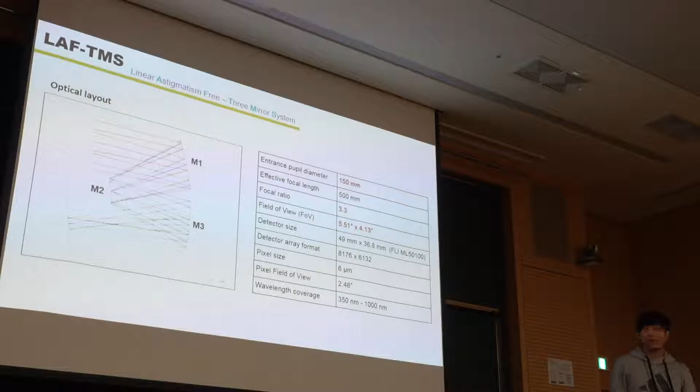So LAF-TMS is an off-axis three-mirror system. There are three off-axis mirrors with an entrance pupil diameter of 150 and a focal ratio of 3.3. And this is a very wide field of view telescope, with 5.5 by 4.1. So this optical design is quite unique. So let me explain with one example.

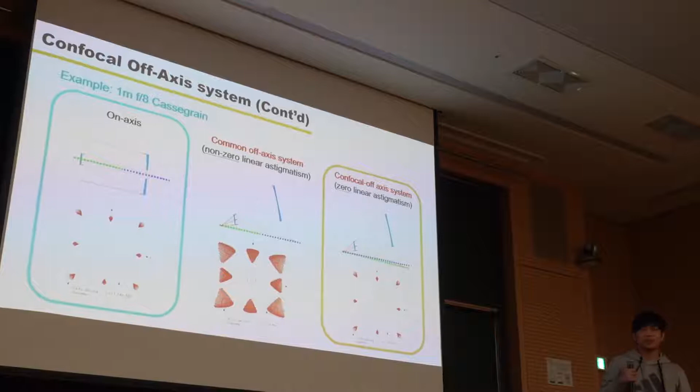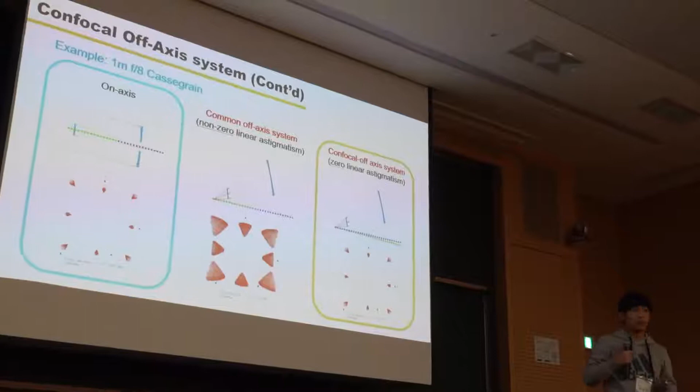So for instance, if there is a 1 meter Cassegrain on-axis system, we have an identical point source image at the image center, and there is coma aberration on the other field. This is normal aberration. But if we move on to a common off-axis system, there is exactly the same optical performance at the center, but there is additional aberration on the other field, which is linear astigmatism.

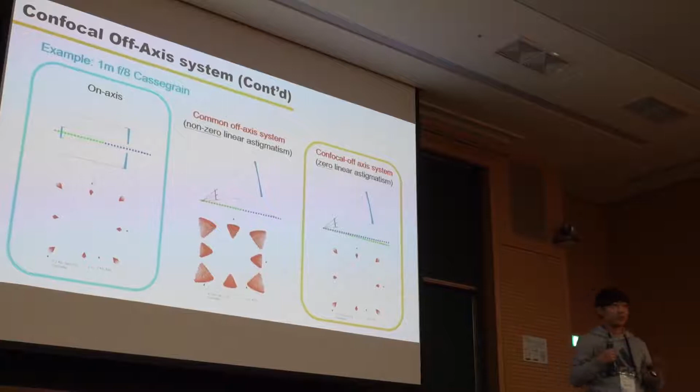So actually, this astigmatism degrades image quality significantly, even worse for the wide field of view system. But if we design the off-axis system as a confocal system, we have exactly the same optical performance as the on-axis system by eliminating linear astigmatism.

So with this optical design, I designed the aluminum mirror. As this material is aluminum, we can just mount this mirror to the optomechanical structure using screws. So we put the screw, and there is a shim structure between the mirror and the optomechanical structure. And also there is an L bracket on the side of the mirror. So by changing the thickness of this L bracket and shim, we can adjust the mirror position for the

alignment. And there is a thermal expansion slot on the side of the mounting position. This slot suppresses the assembly stress and also the thermal stress. So this is one example of the simulation result. I put the assembly torque on these 3 points, and this color scale shows the displacement and stress.

And this red part shows that there is much stress from the assembly torque, and this part is displaced by the torque. But if you see the mirror surface, this stress doesn't really move onto the mirror surface, so we can protect the mirror surface from the stress. So the results show that for all M1, M2, M3 mirrors the surface RMS error by assembly torque is around 51 nanometers to

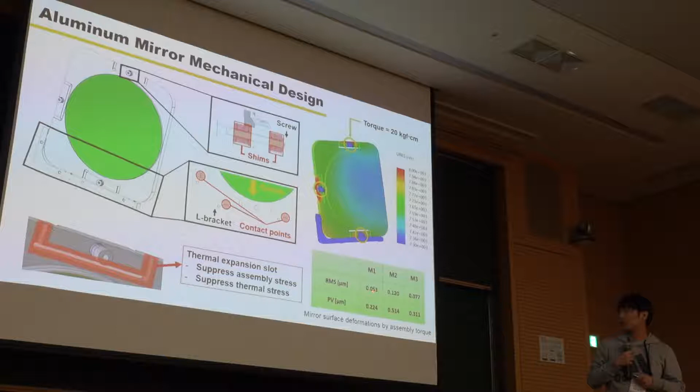And we also designed the optomechanical structures. The optomechanical structure has 4 big components: this yellow one holds M1 and M3, this gray one holds M2, and this blue one suppresses stray light, something like a baffle. We found that much of the stray light is reflected by this M2 mounting surface, so that's why we put this structure to suppress the stray light. And all the mechanical structures are lightweight, because LAF-TMS targets a satellite payload system.

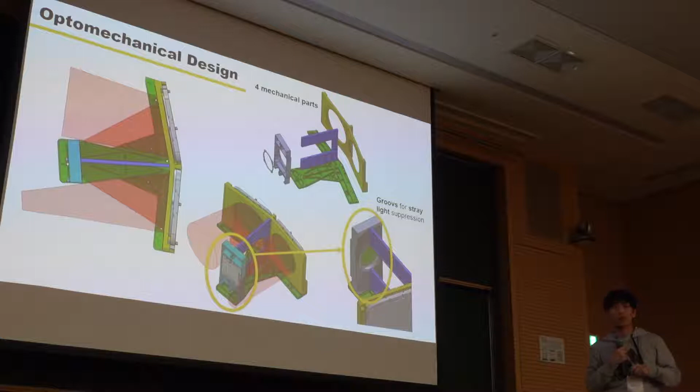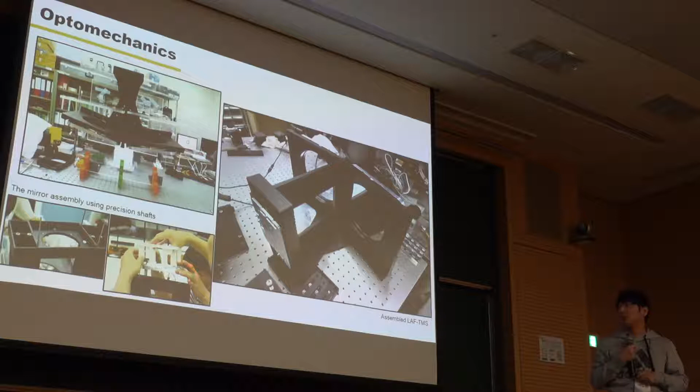So these are the pictures after we fabricated, and this small picture shows the accurate assembly process of the mirror. We use this precision shaft to accurately position the mirrors. And this shows the assembled LAF-TMS. And as this system targets a satellite payload, we need to have analysis for the vibration environment.

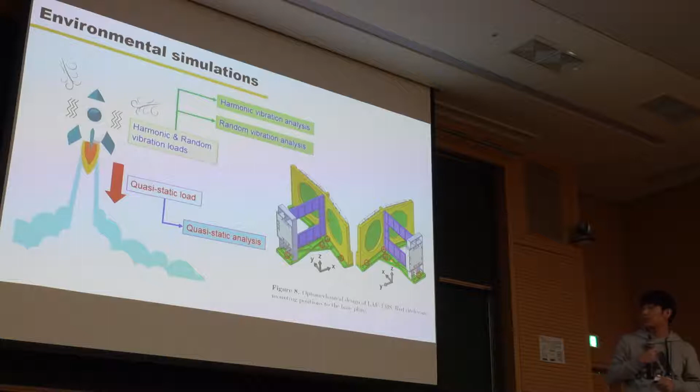So we consider the quasi-static load, which acts when we launch the system, and also harmonic and random vibration loads. So we did the quasi-static analysis and harmonic and random vibration analysis. These red circles show the boundary condition, which is the fixed position of the whole system.

For quasi-static analysis, we used the mass acceleration curve for the quasi-static load. This calculates the maximum acceleration for a specific payload mass, so we can calculate the bound of acceleration with this equation. For our case, the mass of the LAF-TMS is around 10 kilograms, which corresponds to around 10 g. So we put this 10 g on all three axes.

And this figure shows the stress plot. In each axis, we pick the maximum stress point, and we compare this maximum stress with the yield stress of the material, which is 275 megapascal. And then we calculate the margin of safety. If the margin of safety is positive, we can say this system is safe for this environment. And if the margin of safety is negative, it indicates design failure.

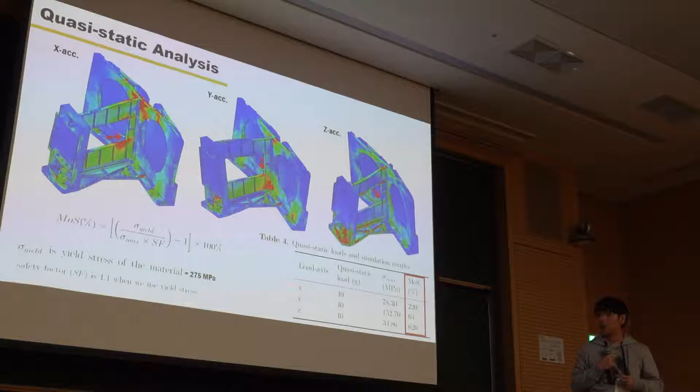So if you see this part, we have all positive margin of safety for all three axes. So this is quite okay for the quasi-static load. And also we need to do some modal analysis to calculate the natural frequency of the system.

So this is the payload system for the satellite, and this will be mounted on the launch system. So we need to avoid matching the natural frequency of the payload and the launch system to avoid the resonance phenomenon. Normally the launch system requires the natural frequency of the payload system to be higher than 100 Hertz, and our natural frequency is around 121, which is quite okay for the general requirement.

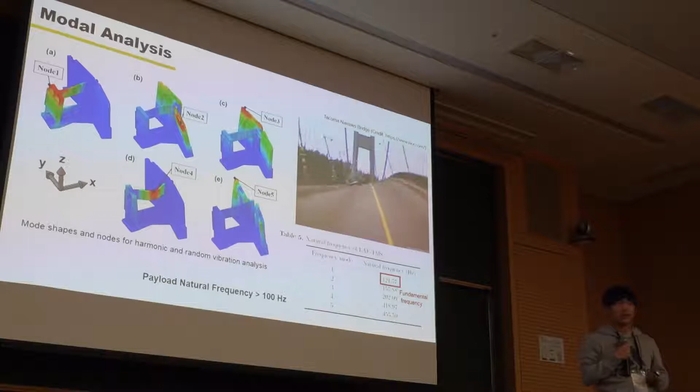So this shows the response plot for the harmonic analysis and the random analysis. If you can see these black lines here, they are actually the input values that I just showed you on the last slide. And the red, blue, and magenta colors are the responses, which are the results of the simulation. You can see there are some peaks at specific frequencies; the x-axis is frequency. These peak frequencies actually match the natural frequencies of the system that I analyzed in the modal analysis.

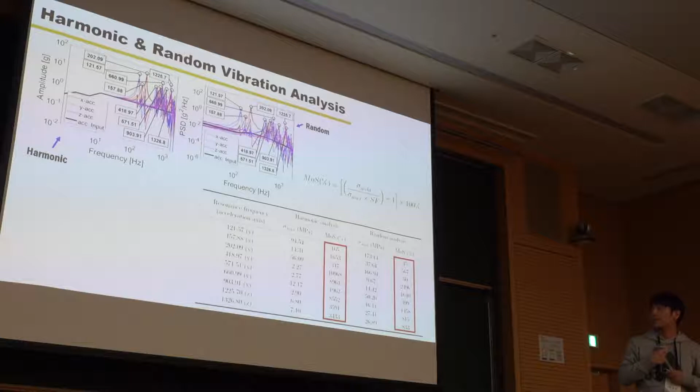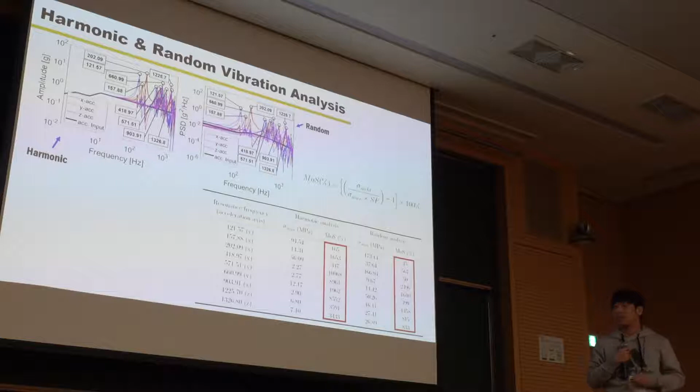So I got the maximum stress value at that frequency for both simulations. For both analyses, for all resonance frequencies, I picked the maximum stress and compared it with the yield stress. And then I calculated the margin of safety, which is almost the same process. So you can see here, there are all positive margins of safety. So I can say that this is quite okay for the harmonic and random vibration analysis, and also for the quasi-static analysis.

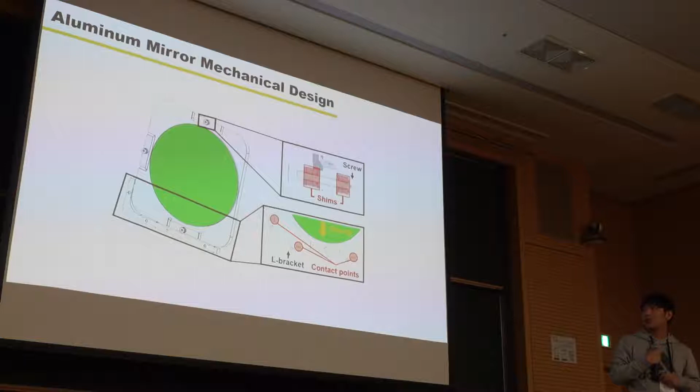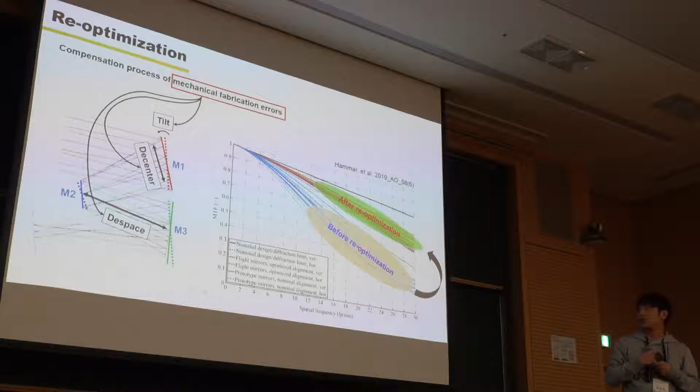In the very first part of my presentation, I showed you the mirror design. There are shims and an L-bracket between the optomechanical structure and the mirrors. By changing this thickness, we can actually adjust the mirror position. For instance, if we have some errors from the alignment process or the fabrication process, like tilt or decenter of the mirrors, or despace, which is the inter-mirror distance, then our optical performance will degrade by this error. But by adjusting this position, we can actually maximize the optical performance again.

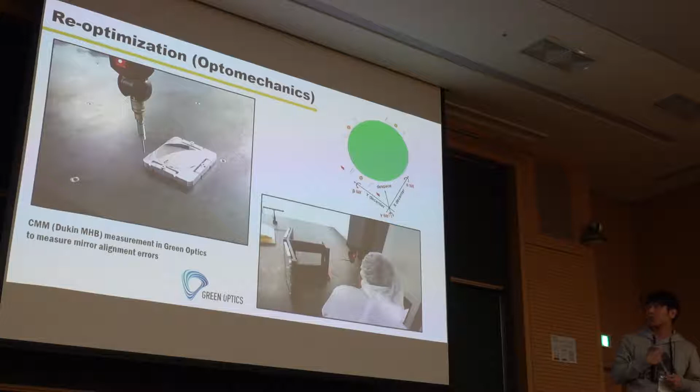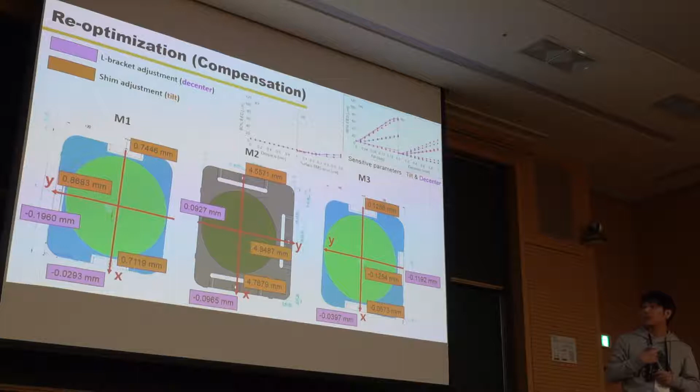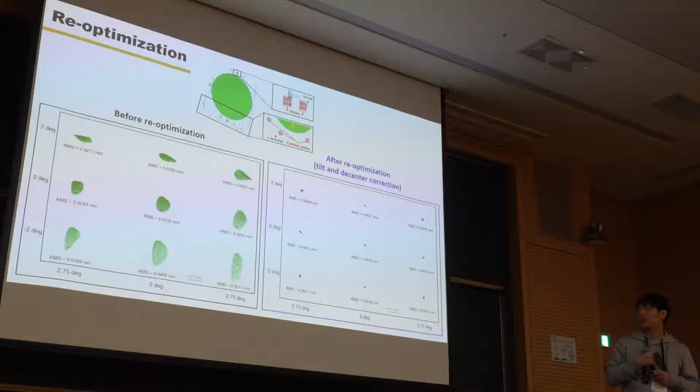In this process, we only compensate the tilt and decenter, not the despace, because from the sensitivity analysis, we found that tilt and decenter degrade the optical performance more significantly than despace. So we only compensate these two values. The left one is the simulated one with the misalignment errors, so you can see a large spot size. Then if we optimize the system, we get nearly the nominal design.

And then we also measured the optical performance, not only at the center, but for the whole field of view. If you can see, there is no dramatic optical performance degradation by linear astigmatism for all fields of view. So this is the optical performance result.

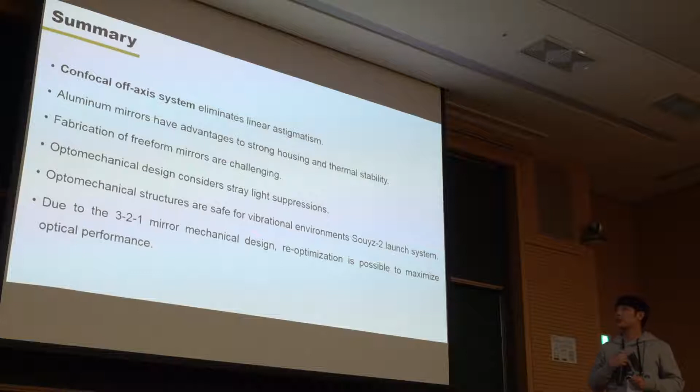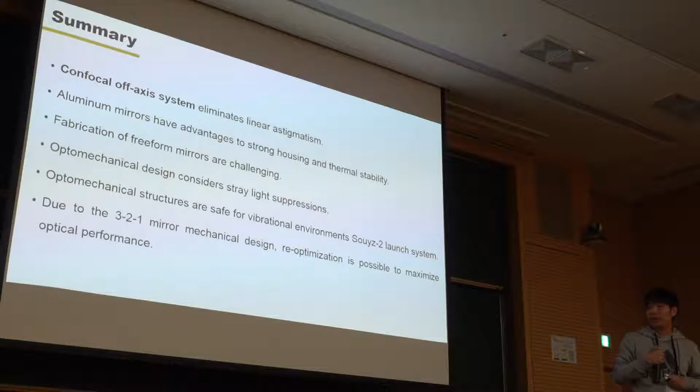To summarize, we designed the confocal off-axis system, which removes the linear astigmatism, and we fabricated mirrors with aluminum, and optomechanical structures that also consider stray light suppression, and these structures are safe for the vibration environment of the Soyuz-2 launch system. And there is a mirror alignment mechanism in the optomechanical design, so we can optimize their position to maximize the optical performance. So this is my presentation. Thank you.

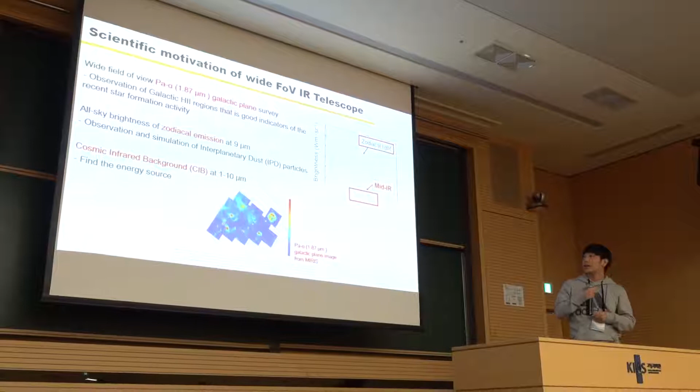Thank you for giving your talk in English. My question is, what wavelength of light does this system work over? This is the prototype of the payload for now. Originally we targeted this system for IR observation with a wide field of view. So we can observe the Paschen alpha line in the galactic plane, and also lines in the mid-infrared range; this is the satellite payload. And also CIB observation at infrared wavelengths.

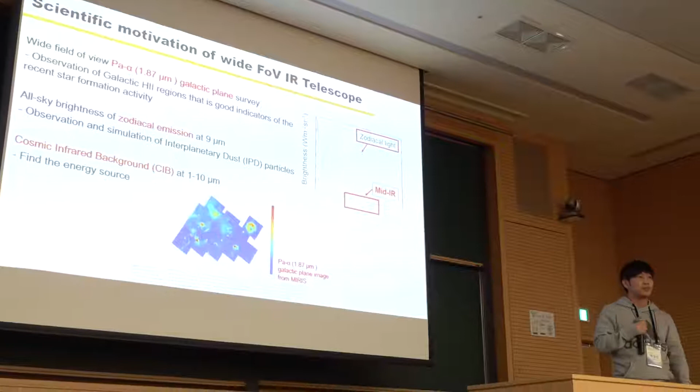Do you think it would be possible to shift towards bluer wavelengths like the optical? We think so. Yeah. The optical design is basically a mirror system, not lenses, so it is not wavelength dependent. So it's quite okay.